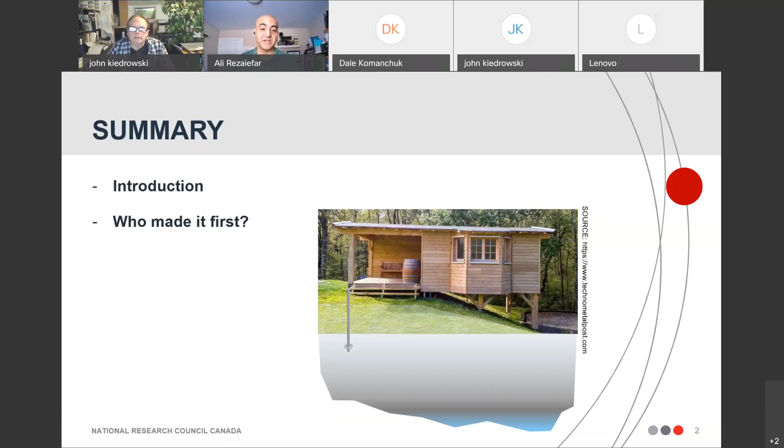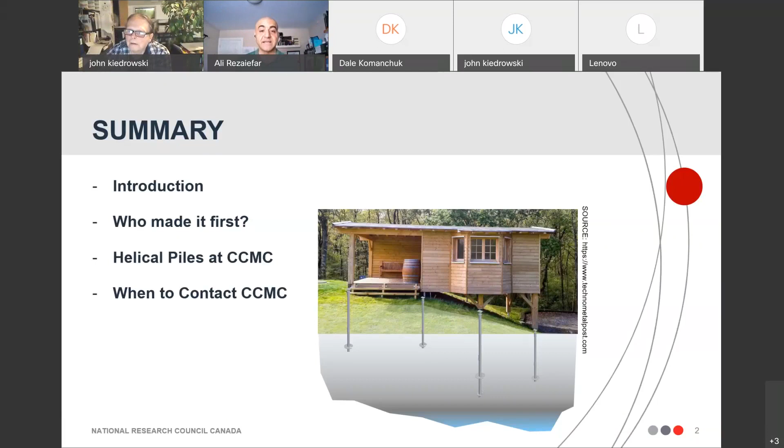As a summary for this presentation, I will have a quick introduction about this system: what is a helical pile, how do we deal with it, and what's the advantage. Who made it first? This is a main issue, an interesting one, because everybody is claiming to be the first one who invented this system. Then the history and the state of helical piles at CCMC, where I work, and the main theme of the presentation, which is when to contact CCMC when you have questions.

So we can start the introduction by talking about what a helical pile is and what kind of name we should associate with it. The first thing that comes to mind is: is it actually a helical pile or a screw pile? Because I hear screw pile a lot.

If you Google the term helical piles, it returns 820,000 results, which is interesting. That's a lot of results. But when you Google the term screw piles, it returns 7,400,000 results. So it's clearly a screw pile. It's not even fair to compare these two names. You know, it is a screw pile, it has to be.

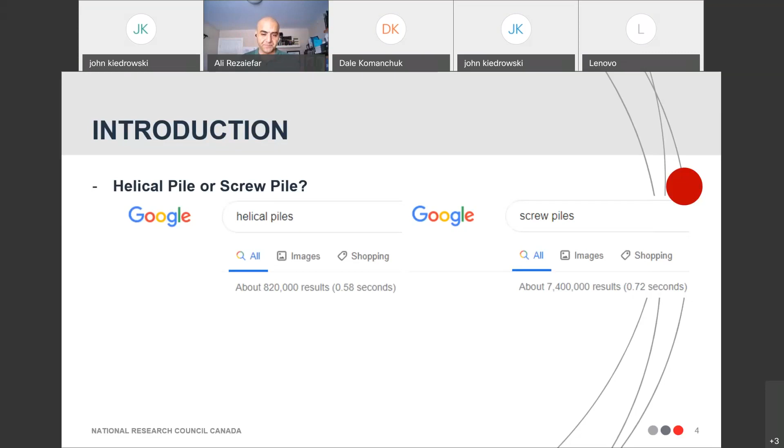But no, the reason we have so many results for screw piles and so few for helical piles is that the term screw pile was used originally when this kind of system started everywhere. But recently, in the 21st century, we have new publications like this one, the textbook by Howard Perko on helical piles, a practical guide to design and installation, which uses helical pile as the definitive term to address these kinds of piles.

And this is the reason: the geometry of the main part of the pile should be a helicoid. The geometry should follow a helix timeline.

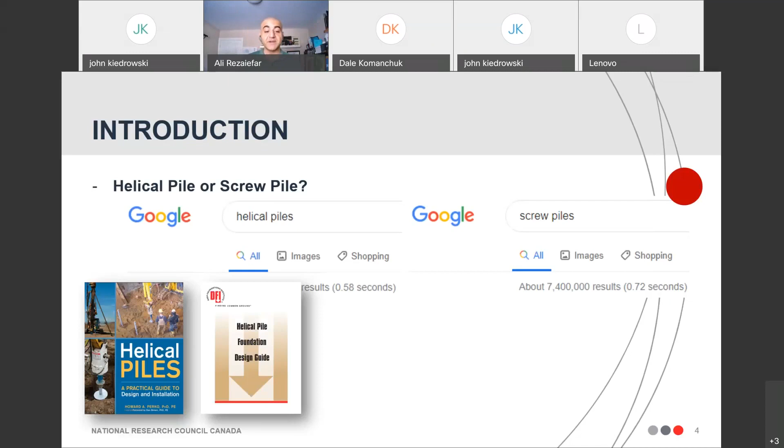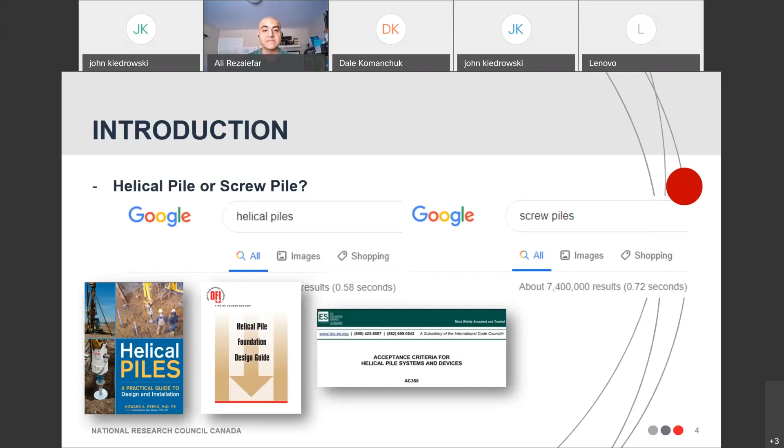And then we have the Deep Foundations Institute in the United States. They issued their design guide for helical pile foundations, and again use the term helical pile. So this is the term we are dealing with nowadays. Also, ICC-ES refers to this system as helical piles. And after all of them, CCMC is also deciding on using the term steel helical piles, because right now what we have in our technical guide is called auger installed steel piles, which is not a very good term. So we are changing that to helical piles.

So this is about the name.

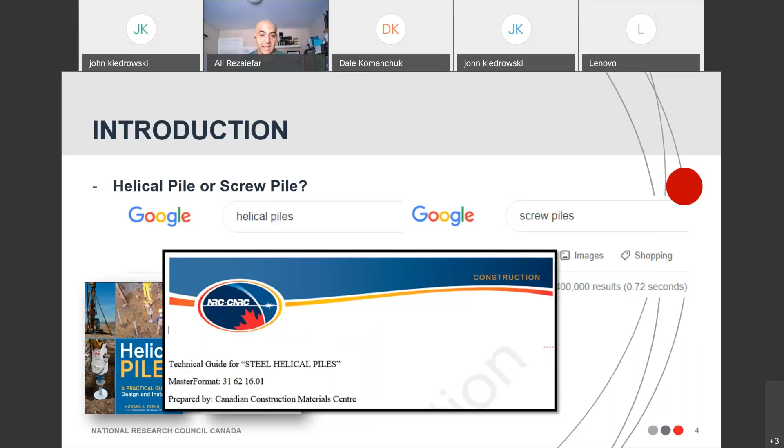Before we know anything about these piles, we need to know a little bit about the geotechnics—some basic geotechnical terms and background—in order to be able to see and review this system.

Whenever you want to build a structure, let's say a column, you want to put a column on soil and put load on it. Chances are when you put the load on, it will start to sink. The reason is that soil is not as strong as concrete or steel. So whenever you put steel or concrete on soil, it tends to go in.

And we have a frost line, obviously, that complicates things. So we need to make sure we have a foundation under the column. The best way for many applications, the most popular way, is to dig below the frost line, build a footing mainly of concrete, and then build a column on top of it.

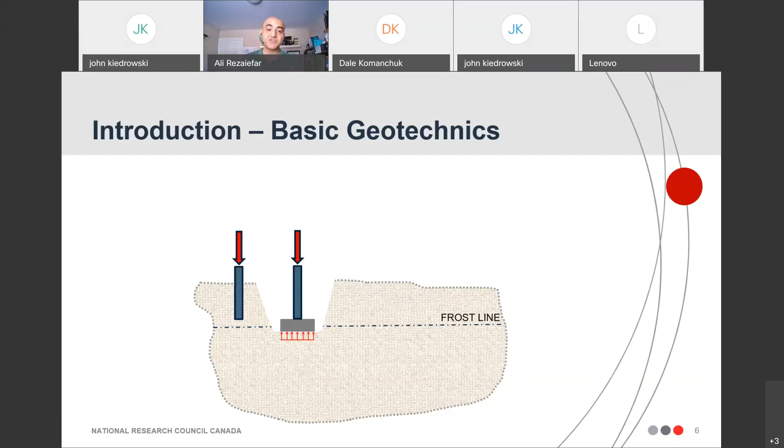Then when you put the loads, the pressure is distributed over the soil so it won't sink into the soil. Now, there is a big challenge with that, because when you're dealing with concrete, you have to always keep in mind that concrete needs to be cured. And curing of concrete is relatively a long time—7 to 28 days is required for the concrete to cure.

Given the fact that in Canada, and more particularly in northern Canada, the construction season is so short, we have to literally save on days. We need a system that doesn't require curing time. And that's when the helical piles come into play.

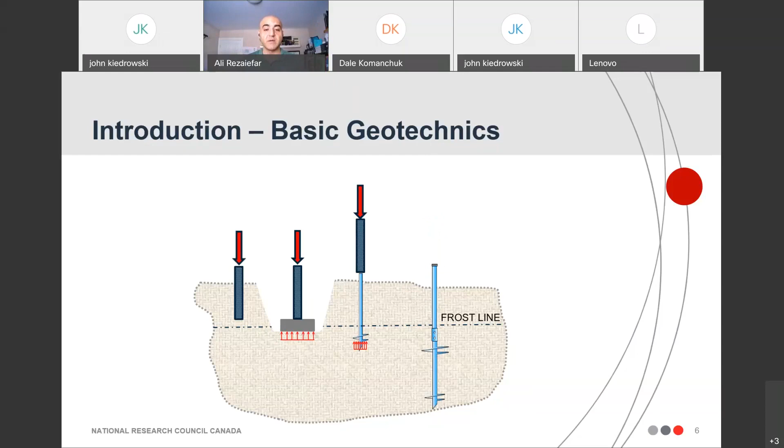You can just drop the helical pile, drive it into the soil, pass the frost line, and then build your column and put the loads. The loads will create pressure into the soil, and you need to design it accordingly. In some cases, when that pile is not sufficient—the loads are higher, or the depth doesn't meet your requirements—you can go deeper. You can have a longer helical pile with maybe more than one helical bearing plate, and build on top of that. Now that we know how helical piles can help us, we can look at a helical pile and check the main parts and components of such a system.

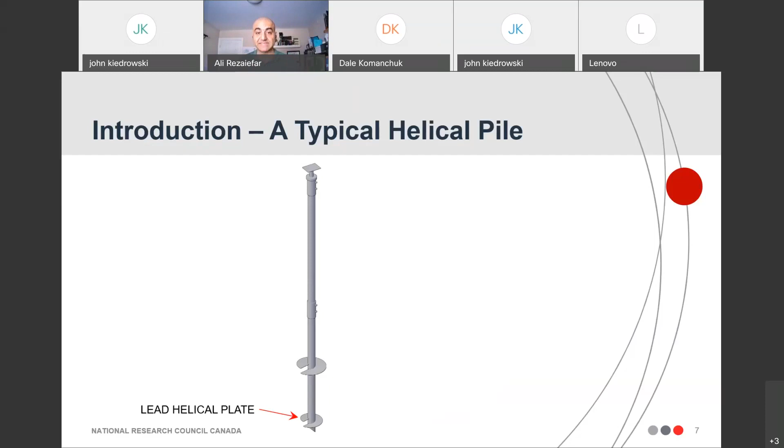So, like I said before, the main component of a helical pile is the bearing plate. Depending on the number of bearing plates on a pile, we call the first one that gets into the soil the lead helical plate.

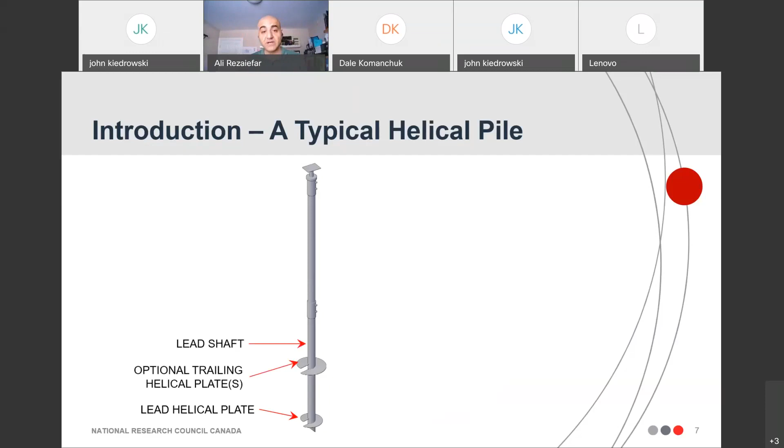This plate is connected to a lead shaft, mainly by means of welding. And if we need more than one plate—a second, a third, more—we can weld them onto the shaft, and those are called the trailing helical plates.

And if we need more depth, if we need to go deeper in the soil, we can use optional extension shafts. Those extension shafts are connected to the lead shaft by means of a coupler mechanism, which could be bolted or welded. The main thing is that the details of that coupling system should be predefined.

And then once we have our pile installed in the soil, we need a pile head assembly to basically connect it to the building and transfer the load from the building to the soil using that pile.

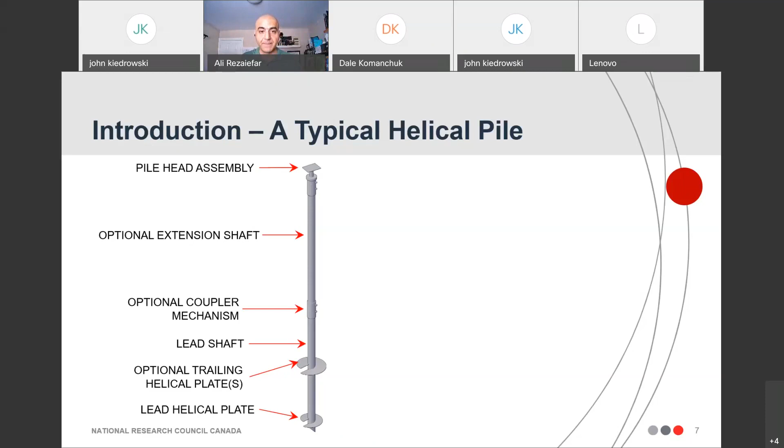Like I said, the main component of a helical pile is the bearing plate. But the bearing plate also has two components. The first is the leading edge, the lower edge that first meets the soil. This is the edge that cuts into the soil and advances the pile in. And we have the trailing edge. The distance between the leading edge and the trailing edge is a characteristic of the pile called the pitch.

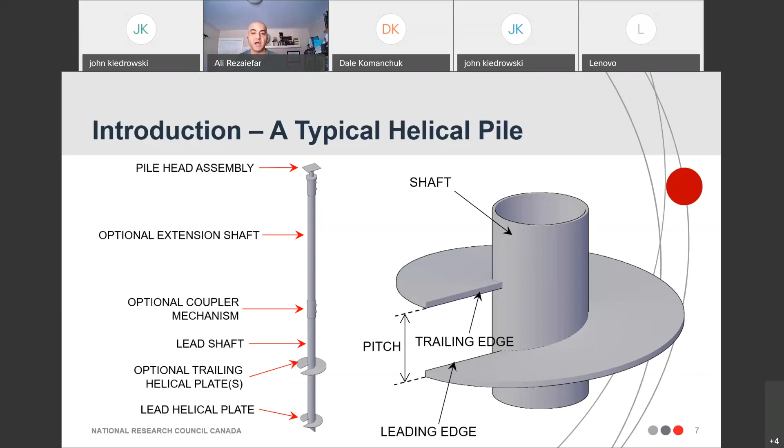So any type of pile has certain characteristics: the diameter of the shaft, the thickness of the shaft, the diameter of the bearing plate, the thickness of the bearing plate, and the pitch. These are the parameters that we can play with to have new different types of piles. We can have as many types of piles as we want by just changing those parameters and coming up with new piles based on the requirements of our design.

Now, the main advantage of helical piles over other kinds of steel piles is that these piles are driven into the soil by means of torque application. So we put the pile on the soil and we torque it in. We apply torque on top of it and it advances into the soil.

This process, the process of screwing the pile into the soil, creates the leading edge of the bearing plate to cut into the soil. And that represents a famous test for checking the resistance of soil, which is called the plate penetrometer test. This is resembling that test.

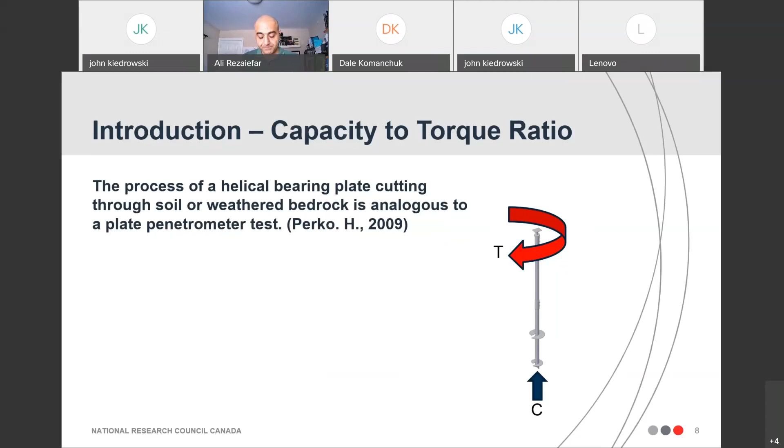So based on that, people in the literature are calling for a direct correlation between the applied torque and the resistance of the pile to the applied axial force. There are many different tests and publications that correlate these two in the form of a value called KT, or capacity to torque ratio, and there is well-established literature on that. So the main advantage of this pile over other kinds of piles is that you are basically testing the pile as you are driving it.

Now it gets us back to the point, who made this pile first? Everybody in this industry, like many other famous industries, claims to be the father of this system. If you go on the website of any of the pile manufacturers in Canada, the United States, or anywhere, you can find some small short history claiming that the person in charge of that company is actually the first person who came up with the idea of helical piles. Now, do you believe it? How would you check it? I don't know.

He came up with this idea a long time ago, in 1832. At the time, he was legally blind, so there was no way for him to visualize the thing, so he used his senses. This is a lot to handle right now — the guy was blind. In 1832, he came up with this idea and used it to design the foundation for a structure: the Maplin Sands Lighthouse, in England. He used 9 of those piles and drilled them into the seabed to build that lighthouse.

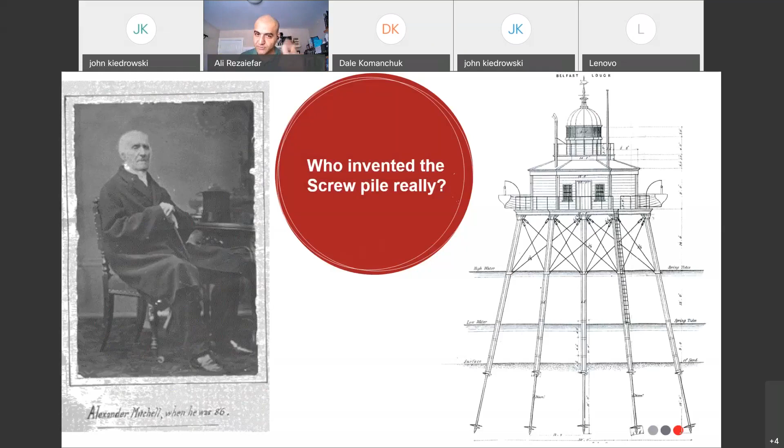How did he drill those piles into the seabed? You guessed it right — he hired a bunch of workers and asked them to go and drill the pile in. This method is not recommended these days because we have labor laws in place, so it's not recommended for safety reasons. But 200 years ago, this is the way they did it, and kudos to them.

So this guy, almost 200 years ago, came up with this idea and built that structure. Now, that structure doesn't exist anymore, but it was such a significant building in British history that a model of it, the one I'm showing right now on screen, exists today in the Museum of Technology in London, England. So whenever you go to London, please go to that museum — it's free of charge. You can go in, and please take a selfie and send it to me. Thank you.

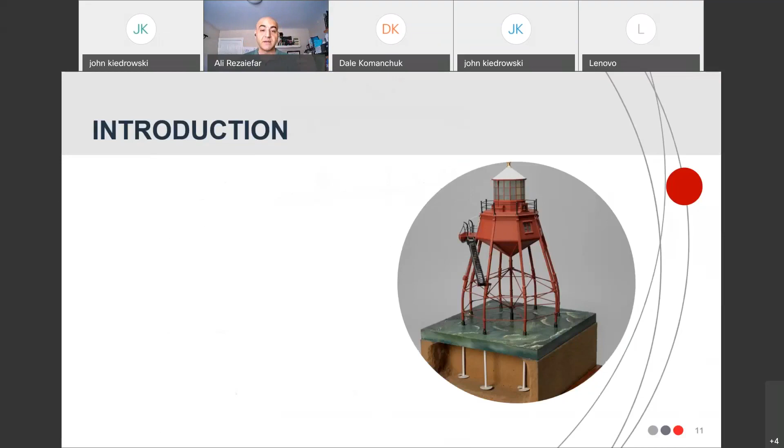And this guy, Alexander Mitchell, when he came up with this idea, he did the right thing. He did what you should do when you have an excellent idea: he patented it, in 1836.

But right after that, when he built that lighthouse, people realized that this is actually an interesting idea, so other people also started filing patents. Between 1830 and 1875, which we call the Marine era, people submitted 5 US patents for moorings, lighthouses, applications of helical piles.

In 1875, people started thinking about applying helical piles for fence posts, and that's where the agriculture era starts. Between 1875 and 1920, people started submitting patent applications for helical piles, 20 of them, to the US Registry of Patents.

Then after that, from 1920 to 1985, in the utility era, people started to use these helical piles for pipelines, guy anchors, industrial applications.

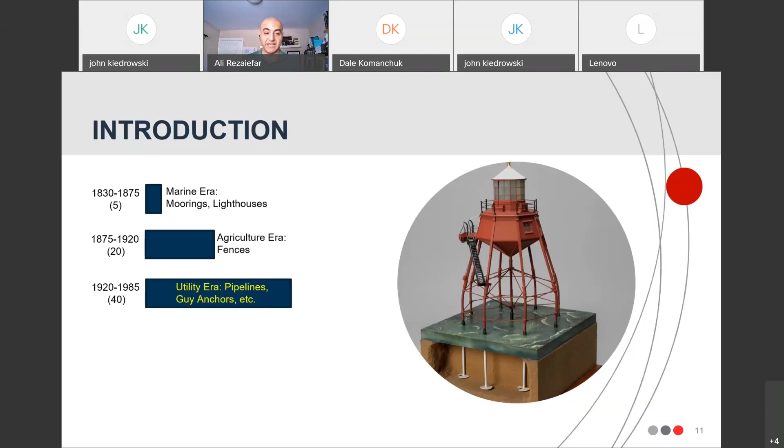And then after that, all over the construction business, in sheds, mobile homes, decks, buildings, underpinning, walkways, you name it, any kind of application, helical piles can be utilized.

There are 100 patents since 1985 until today in the Registry of US Patents. In total, we have more than 165 patents right now existing for helical piles, which is significant.

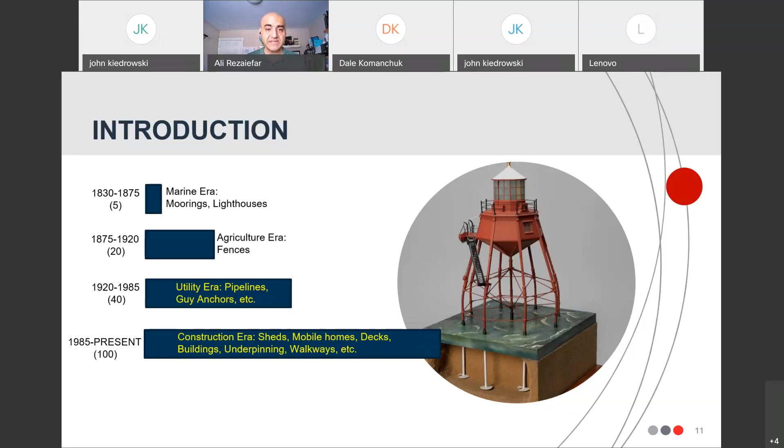When it comes to Canada, CCMC deals with helical piles. CCMC is in place to help the building officers having jurisdiction to deal with all different kinds of building and construction products, including helical piles.

The first application for helical piles was received in 2000, and based on that application, CCMC came up with a technical guide to evaluate such a product in 2001, and the first evaluation report was granted in 2002.

After that, until today, we have 13 evaluation reports existing in the current CCMC registry, with more applications to come. The technical guide for the evaluation of helical piles has been drastically updated based on the state-of-the-art literature and all the new findings in this industry.

Once this technical guide is certified, once it's officially out, which we expect in the coming days or weeks, we will start updating all the existing evaluation reports based on the new technical guide. So this industry is definitely working really fast.

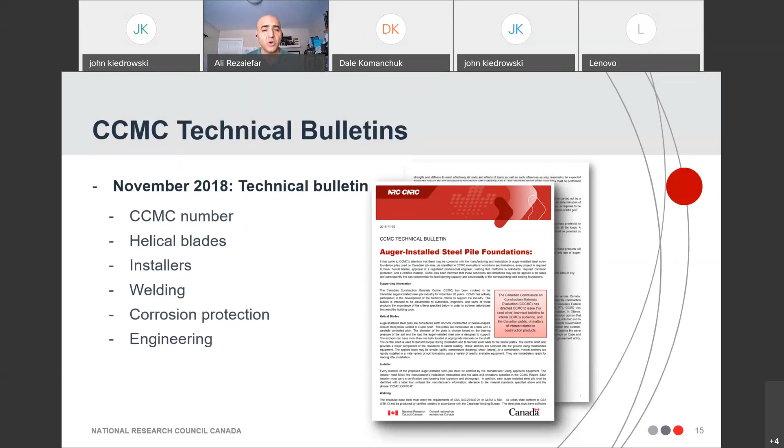We wanted to remind you guys about the helical blades, what's important about helical blades, about the installers, who is certified to install these piles, about welding, and about corrosion protection, and ultimately the engineering required for these piles. Now, I will go through each of these points in detail.

Once you see this mark, you have to check for the evaluation report. The number on the mark should be associated with an evaluation report. The evaluation report is on our online registry, and you can receive it and go through it.

In that evaluation report, it's very important to see the articles and clauses of the National Building Code that the product was evaluated against, and the types of product that were evaluated. This is very important. In the second section of every evaluation report, there is a description part where the types of product are completely explained.

So there might be a helical pile manufacturer who has dozens of helical pile types, but only 3 of them, for example, are evaluated. So it's very important that when you receive an application, you check those piles in that application against the evaluation report.

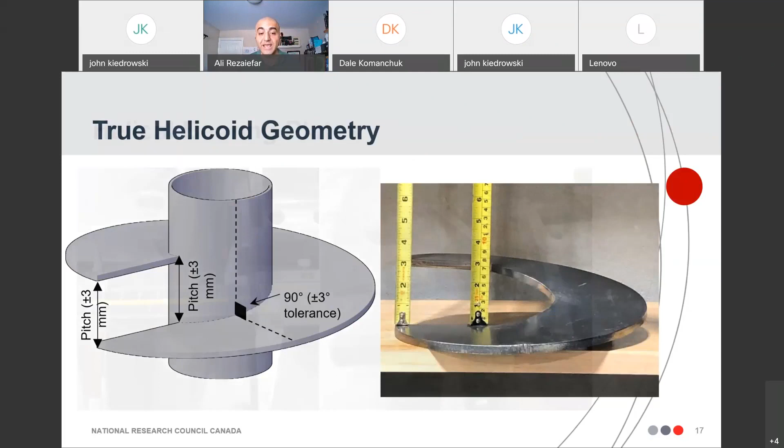We ask all the manufacturers through the evaluation procedure to provide us with that data. CCMC always tries its best to make sure that the helicoid geometry is respected. But sometimes the building officer, the authority having jurisdiction, has to do their due diligence and go to the field and randomly check 1 or 2 piles to see if they are helical.

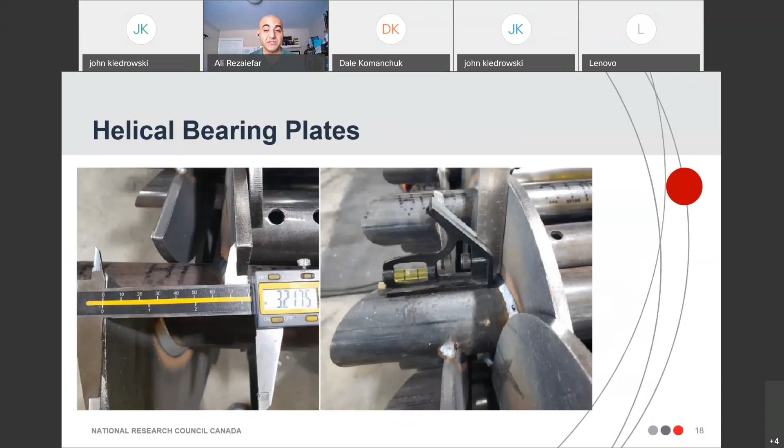You don't actually need any equipment. You can recognize if it's a true helix or not just by looking at them. The right picture, the one with galvanic protection, is a true helicoid. The one on the left, you can see the duck beak -- that is not a true helicoid.

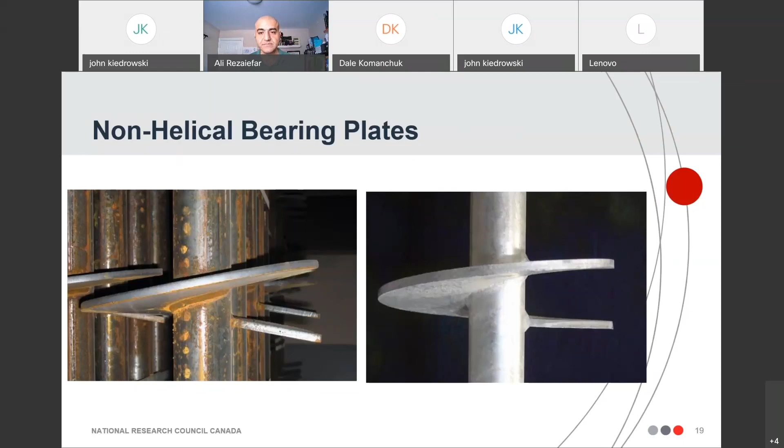That's why the one on the left is not CCMC evaluated, is not approved by CCMC. Even if it has a CCMC number, it's immediately deemed not evaluated by CCMC, and you should raise a flag for those.

Whenever this modification is in place, it's not CCMC evaluated. It's actually written in the conditions and limitations. In the new wave of evaluation reports, we are adding that condition that any modified bearing plate is out of the scope of CCMC. You should ask for engineering documents and engineering calculations to support that, because by modifying the bearing plate, you're reducing the capacity of the helical pile.

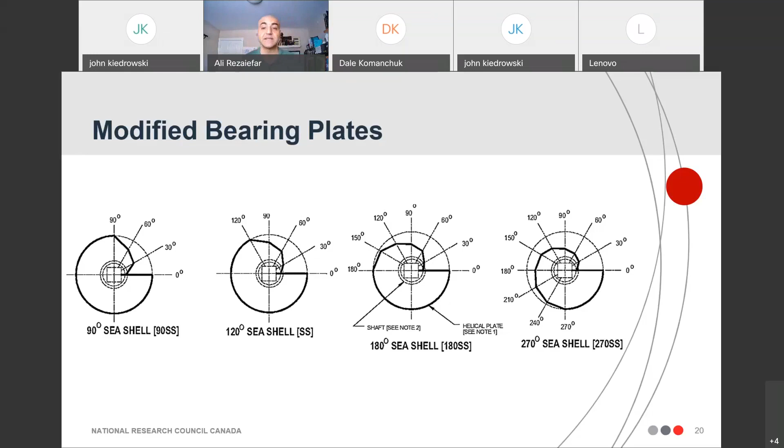About the installations and details, all installers of helical piles must be certified by the manufacturers. You should make sure that competent installers are also certified by the manufacturers. This is also what we ask manufacturers to provide evidence on -- their certifications for the installers program in their quality control documents.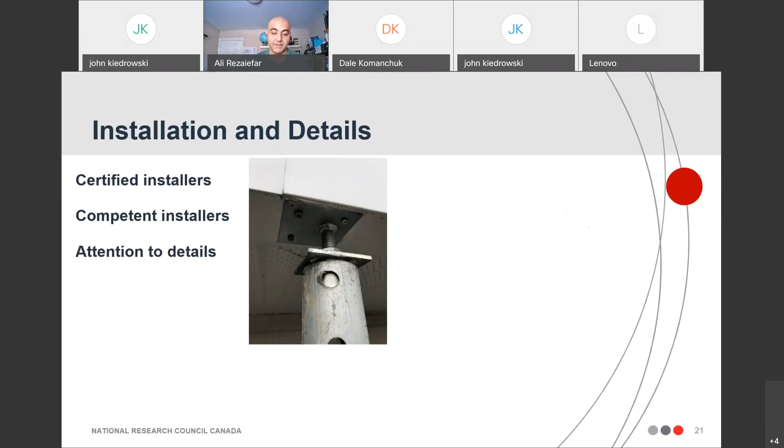Those installers must pay attention to details, and sometimes it's easy to find out where they are not doing right. For example, in this case, they drove the pile and there was a little bit of misconfiguration, so they modified the top plate and the top bracket so they could meet the points where they wanted to insert the pile. This is not acceptable. Or in some other cases, it's just bad engineering, purely bad engineering.

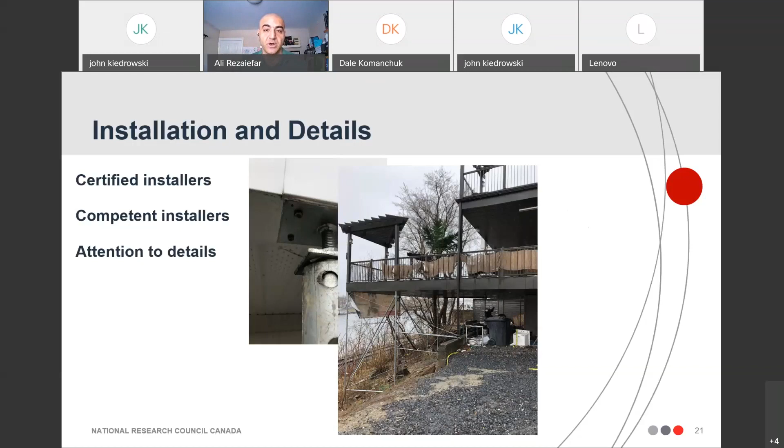Like in this case, they built a terrace over a scaffolding. This is not acceptable. This is not an engineering structure. So in that particular case, the Order of Engineers got involved and they actually shut down that construction. These are the things we have to look into. We have to be careful with those kinds of things.

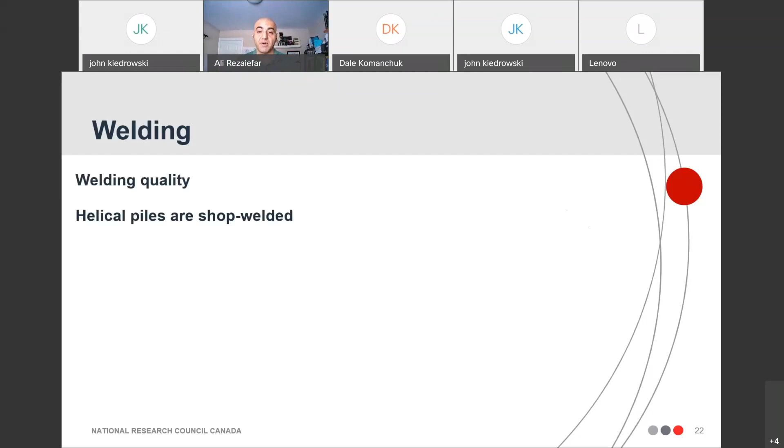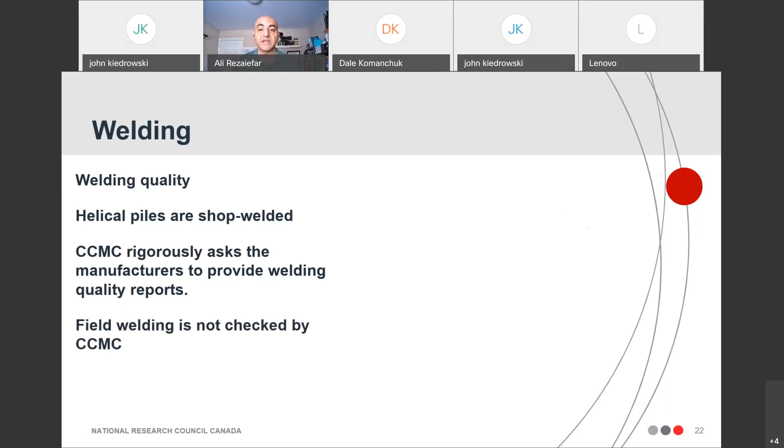Welding is one of the most important parts of this pile assembly. The welding quality is always checked by CCMC, because all helical piles, all the main components, are shop welded. CCMC always asks for the welding certifications for all the welders involved in welding the bearing plates to the shafts. But some manufacturers have details about field welding, and field welding is not checked by CCMC. We cannot go into every field and check for field welding. But some manufacturers might have details about field welding that are eventually evaluated by CCMC.

The building officer, when you go to the site and see bad welding like this, it immediately raises a flag. So if you see field welding, if you see an extension added to the pile, you have to immediately look at the engineering blueprint to see the details of that extension. If it's field welding, all the details must be there. A welding like that is not acceptable.

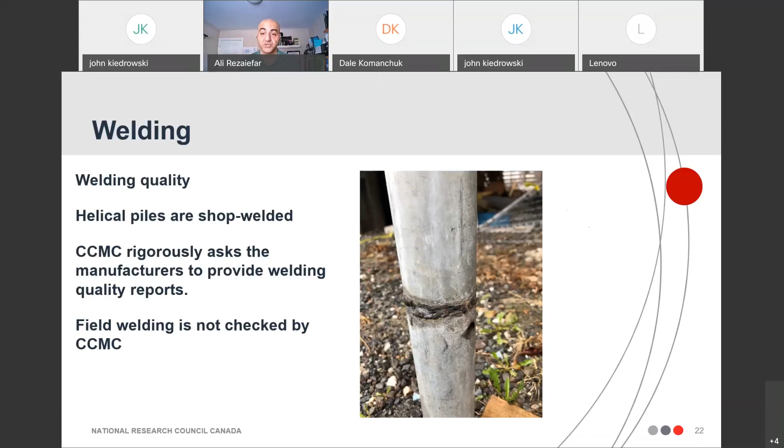This is low quality weld. This is welded on galvanized steel, and then there's no protection. It's probably not acceptable, and you should ask the manufacturer to look into that. Many of the problems with piles, I'd like to remind you, can only be detected during installation, because after installation you don't see it. It's buried under the ground.

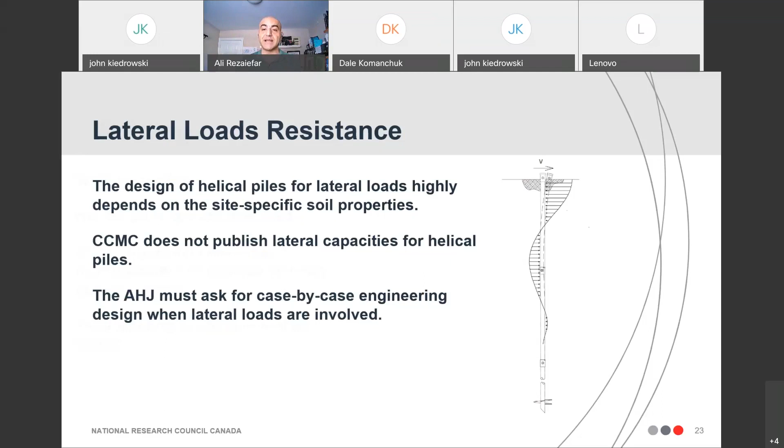Lateral load resistance is not evaluated by CCMC. Any pile that is part of the lateral load resisting system of the structure is not evaluated by CCMC, so you should pay attention to that. CCMC requires manufacturers to come up with case-by-case engineering design when it comes to lateral loads on buildings and lateral loads transferred to helical piles. This is very important. Special design must be in place when lateral loads are involved.

Engineering. So in general, for any project, you need to see an engineering blueprint. In that blueprint, you will see the plan of the building or extension or whatever it is. The engineer of record must have calculated the base forces, the foundation forces, and come up with the number of piles required and the capacity involved with each of those piles. Those are marked on the engineering blueprint, and on that blueprint, the capacity of the pile is requested.

Now those numbers will go to the manufacturer. Another engineer at the manufacturer, or hired by the manufacturer, would design the piles using whatever procedure they want, and come up with the capacity, the type of pile, the depth it should be installed at, or the torque required for installation. They will come up with that design and it will be marked on the engineering blueprint. This is very important.

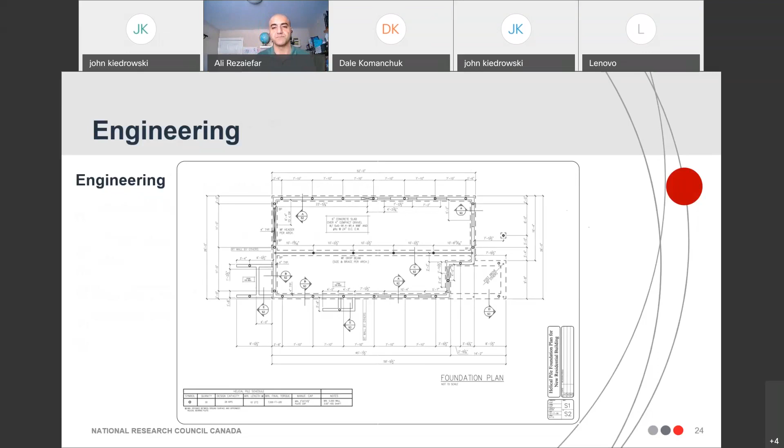So in cases where you have a building where the soil is prone to be corrosive to steel, you should require geotechnical tests, and in those tests the level of corrosivity of the soil must be determined. Once we have that, we can come up with the service life of the building.

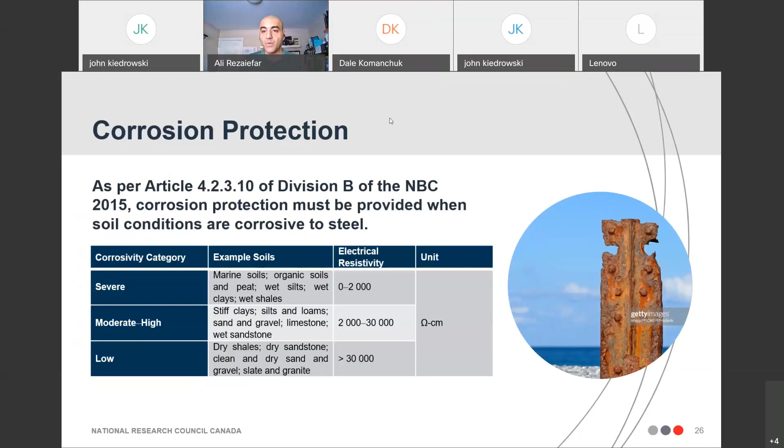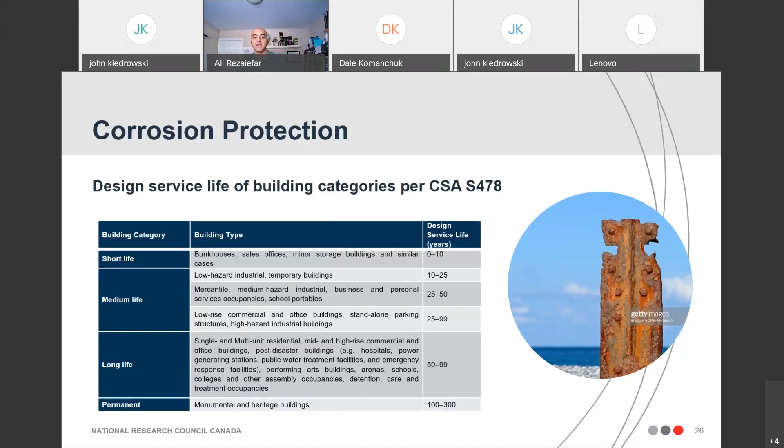Now we have the Canadian standard for the life expectancy, or the service life, of the building. CSA S478 is the Canadian standard for the life expectancy of buildings. There are four different categories for the service life of the building: short, medium, long, or permanent. So your building might be between 0 to 300 years of service life, and for each of them there should be a design regarding corrosion for the helical piles. There are ways to calculate the actual thickness that will be corroded during the lifespan of the building.

For example, AASHTO has this table, and in that table for different kinds of steel, including bare or black steel and galvanized steel, in all 3 different soil corrosivities, it gives you a millimeter per year of corrosion for the steel. For example, if you have bare or black steel in a moderate to high region, it means 0.033 millimeter per year. So if the service life of that building is 20 years, you know that you will need 0.66 millimeters extra steel to be sacrificed during corrosion, so your design is right.

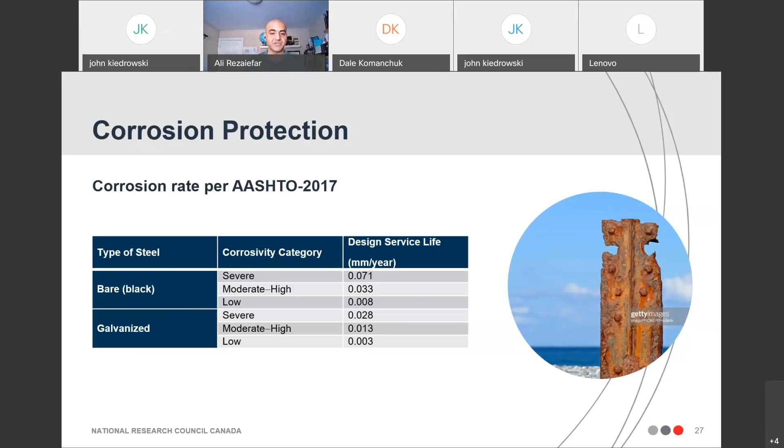All I want to say is that you need to make sure that if you have corrosive environments, the engineers should address that corrosion design in their engineering documentations, in their engineering calculations. And last but not least, I want to double down on this, that you should contact CCMC. When to contact CCMC? Whenever you are in doubt.

This is an example. Two weeks ago, I received a call from an engineer in British Columbia. She was claiming that she designed some helical piles. She used the website of the manufacturer, contacted the manufacturer, and they gave her some details about some piles, about the types of piles, and told her that these piles are CCMC evaluated. Now she based her design upon that information and designed some piles. But when she received the piles in the field, they did not look like the ones in the evaluation report and on the website of the manufacturer.

So she called me, she called CCMC. And although she was not an authority having jurisdiction, not a building officer, a building official, I answered her question. Those piles were not CCMC evaluated, and those piles were not the same as those piles in the evaluation report. So she has a decision to make.

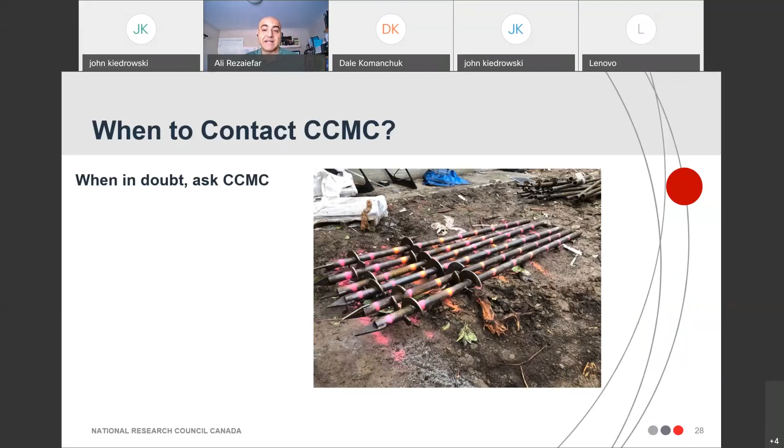She can contact the authority having jurisdiction, notify them, and those piles are not allowed to be installed. Or she can ask the manufacturer to come up with engineering calculations to support these piles. That decision is a wise decision, a calculated decision. CCMC helped that engineer with making that decision. So if you have any doubt about the helical piles, feel free to contact CCMC, and that's the end of my presentation. If you have any questions, I'm here for you.